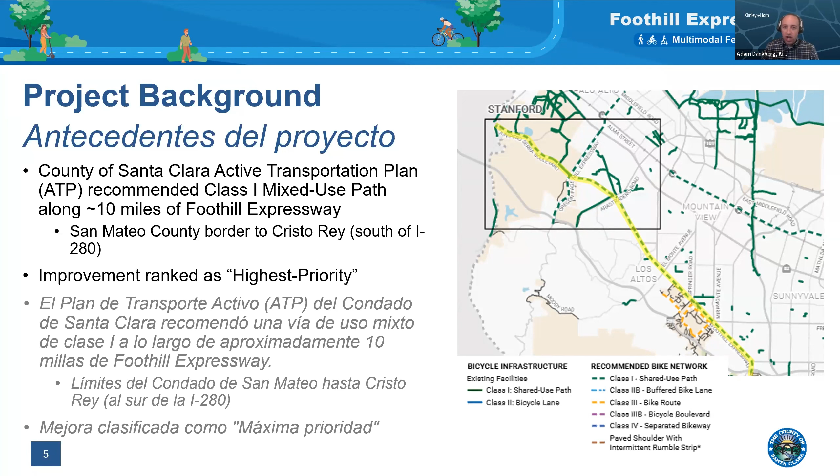Our study is building off that initial recommendation to do a much deeper dive into this corridor, to identify what can fit and what some potential solutions are, looking at both the specific Class 1 recommendation as well as other opportunities to improve walking and biking in this corridor. This recommendation in the active transportation plan was rated as highest priority, the most critical tier of improvements, and that's why the county very quickly moved from that transportation plan into this project, where we are looking at what can actually be done to advance improvements here.

As I mentioned, the project corridor we are studying is the full length of Foothill Expressway and Junipero Serra Boulevard in Santa Clara County, extending from Alpine Road and the Alpine Trail at the county line, down through Stanford lands, City of Palo Alto, Los Altos Hills, and ending just into Cupertino south of 280. So we'll be looking at that entire segment.

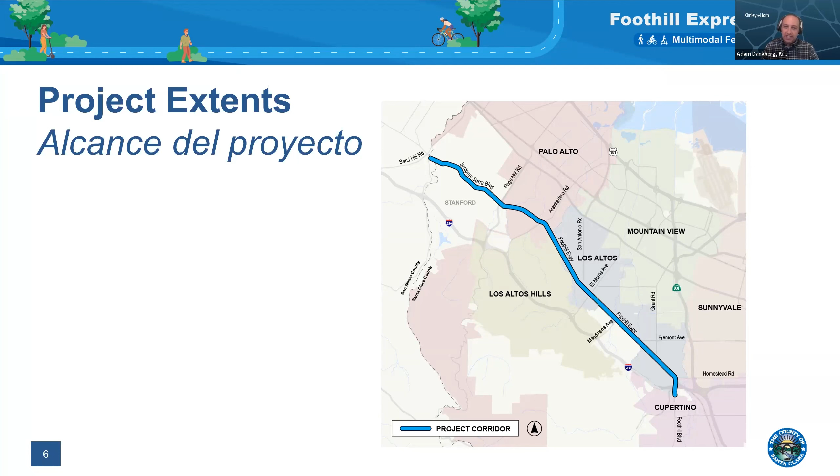In terms of what this project is, it is a study. So there is not money yet at this time for final design or for construction of any improvements. We certainly haven't identified what the improvements are yet — that is the purpose of this study.

So we're starting out by evaluating current conditions, trends, and behaviors in the area. We're conducting engagement like tonight and last night, and we have an online survey that we'd love for you to participate in. We're collecting all that feedback and comparing it with the current conditions to identify potential solutions to improve walking and biking in this corridor. We'll develop some alternatives, come back to the community, then identify a preferred alternative and an implementation plan to advance the project for the county to pursue future funding opportunities.

Our scope of work takes us through preliminary engineering, and that is it. The county will need to find more money for future phases. This current phase is funded by a VTA Measure B grant, so we appreciate their contribution to this effort.

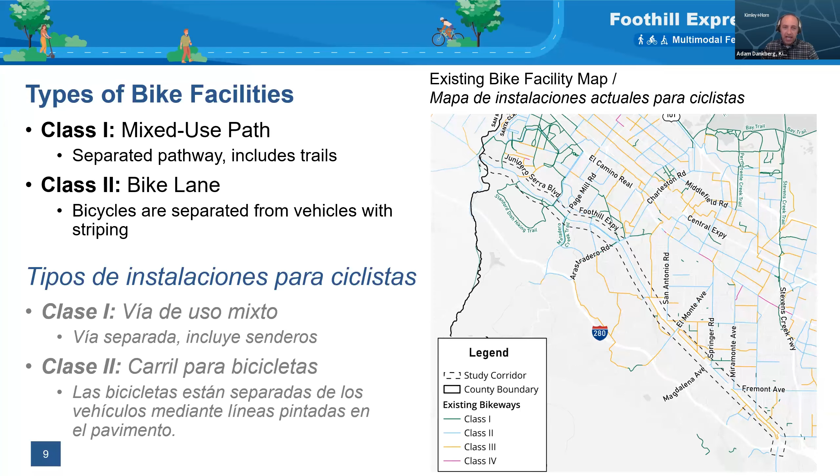So continuing on, Class 3 is a bicycle route. Bicycles are allowed, but there's no dedicated space specifically for cyclists, so bicyclists share the street with motor vehicles. The remainder of Foothill Expressway is considered a bicycle route. There are shoulders, but they aren't marked as bike lanes, and in certain portions cyclists need to share the traffic lane.

Class 4 is a bicycle-only facility, different from a Class 1, but separated from vehicles - it can be separated by bollards, concrete medians, or raised to curb height. There are different ways of separating it, but the idea is there's some separation for bicycle lanes from vehicles. These can be either 1-way or 2-way, and there are not currently any Class 4 facilities on Foothill Expressway or Junipero Serra.

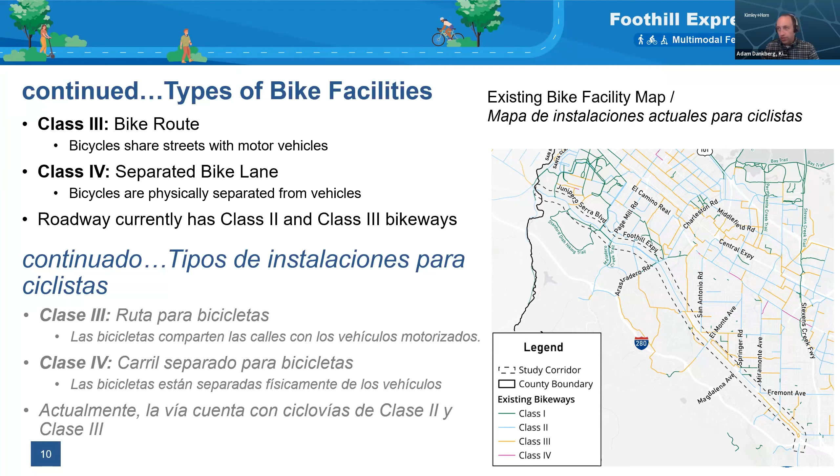Next we wanted to walk through the corridor to inform what we've learned so far about the existing corridor configuration and some key challenge areas we're aware of. We had been out there and observed the corridor to identify initial findings, and we'll pair that with feedback from this process.

So the far northern segment, north of Page Mill Road - a few things stuck out. We observed pedestrians and runners in the bicycle lane on the shoulders, running up and down the corridor. This segment is unique with 1 lane in each direction and no medians; the rest is a wider configuration. There are limited crossings of the corridor on Junipero Serra, mostly at limited intersections, and even there some crossings are missing. There were recent traffic calming measures installed between Campus Drive and Stanford Avenue that added medians and chicanes to move the roadway and reduce traffic speeds.

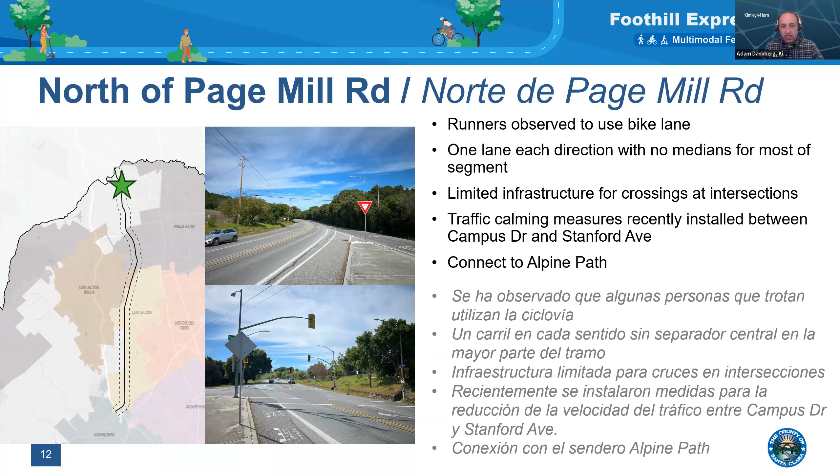We also note there's the Alpine Trail at the far northern end in San Mateo County. Moving one segment south, between Page Mill and Arrastradero, the corridor widens out a bit more and there are marked bicycle lanes. There are some really challenging intersections that exist at several locations, where it's not just Foothill Expressway and the cross street, but frontage roadways that intersect the cross streets really close to Foothill Expressway.

So you end up with complex intersections with a lot of vehicle, pedestrian, and bicycle movements in all directions, causing navigation challenges particularly for pedestrians and cyclists. The Arrastradero Road/Miranda Avenue intersection is certainly one of the most challenging, particularly given its proximity to Gunn High School. Hillview Avenue is another challenging intersection in this segment. This project isn't just about Foothill Expressway, but about creating a connected bicycle and pedestrian network across and through that entire area. Palo Alto is currently updating its bicycle and pedestrian planning, and we'll incorporate our work with that ongoing effort.

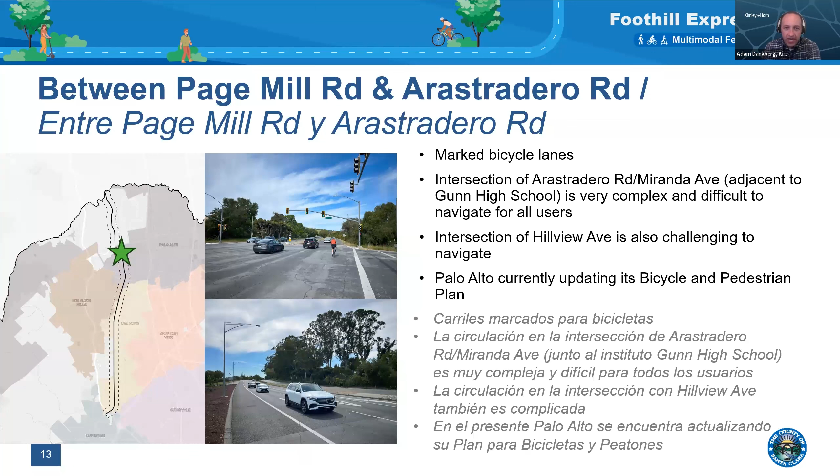The next segment is between Arrastradero and North San Antonio Road, through downtown Los Altos, with a lot of pedestrian activity crossing Foothill Expressway and interest in improving the safety and comfort of those crossings. Not unique to this area, but common here, is the provision of right turn slip lanes - lanes separated by a pork chop or raised island from through lanes that allow higher speed turns onto or off the expressway. This configuration works okay for traffic, but has safety challenges for drivers, walkers, and cyclists, so it's something we can focus on improving as part of this project.

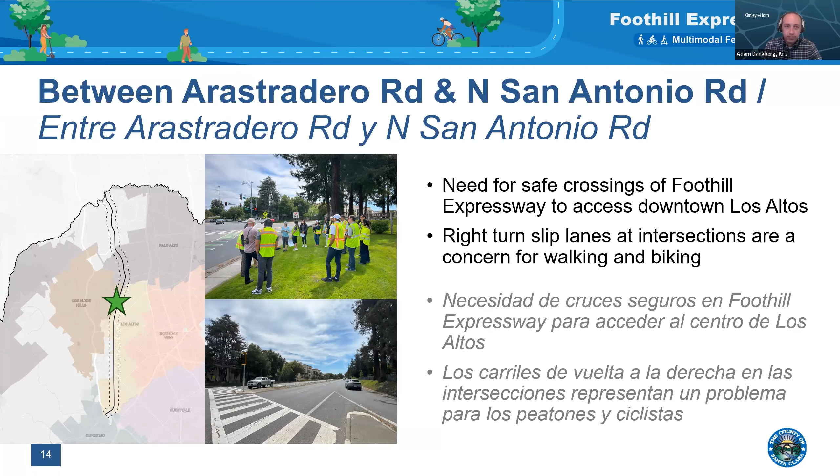Some additional complex intersections at Springer Road and Magdalena Avenue. There are some intersections that have received recent improvements, such as Grant Road and St. Joseph Avenue, where additional striping and crosswalk improvements were installed. This location also provides access to Rancho San Antonio County Park and the Open Space Preserve, which has a couple access points that increase pedestrian walking activity in those locations.

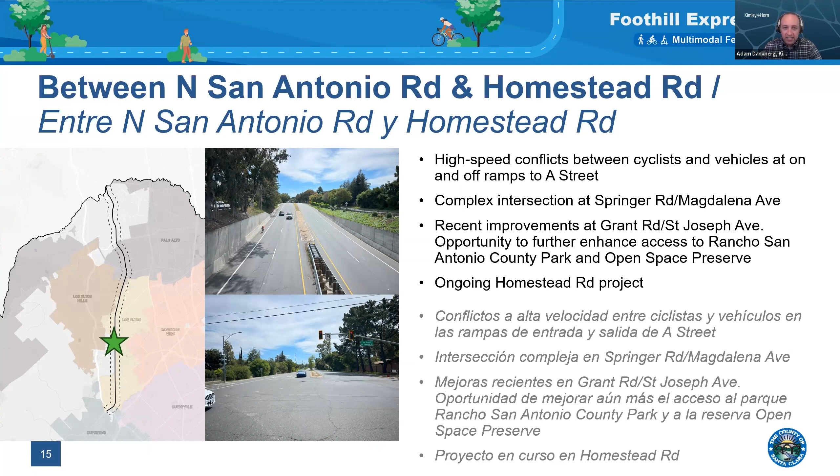We also want to recognize the Homestead Road project that VTA and the county have been working on with the cities along the Homestead Road corridor. That project is not yet completed and is still advancing, and we are recognizing that it has some very specific improvements around that Homestead Road intersection.

And then finally, the most southern segment includes the 280 interchange. This interchange is certainly challenging for pedestrians and cyclists. There are no bike lanes marked here, and there are high-speed ramps for vehicles entering and exiting the freeway, making it challenging to cross those vehicle weave movements.

There is a portion of this corridor that does have a parallel path. You can see in the little image on the top there, but it is not particularly visible and it's not accessible. So while it's one of the few locations where there actually is a pedestrian type facility near the corridor, it's not really an optimal one. We also want to recognize the access to the open space via Cristo Rey Drive, which is the southern limit of this project.

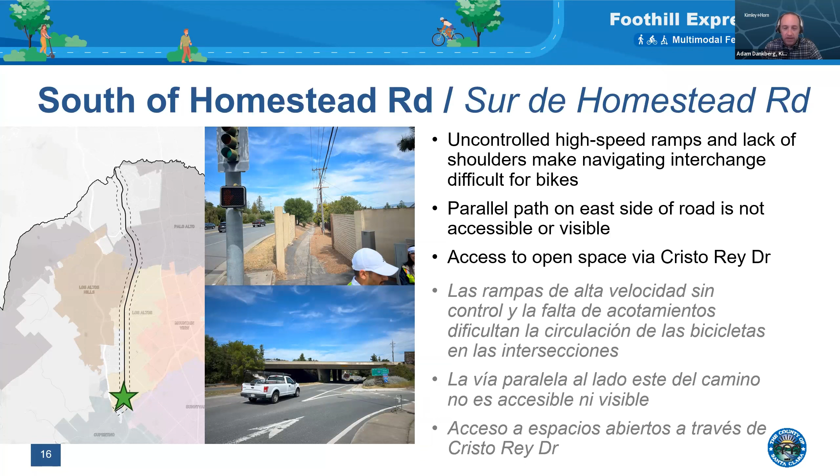So we have completed collision analysis of this corridor, looking at data between 2020 and 2024 inclusive, so 5 years of collision data. This is data that is available to us from the state, collected from local police departments, so we know it's not every collision. There's some discussion that a bicycle fatality is missing and not included here, and we certainly recognize it's not the most complete data set, but it is the most complete one we are able to access.

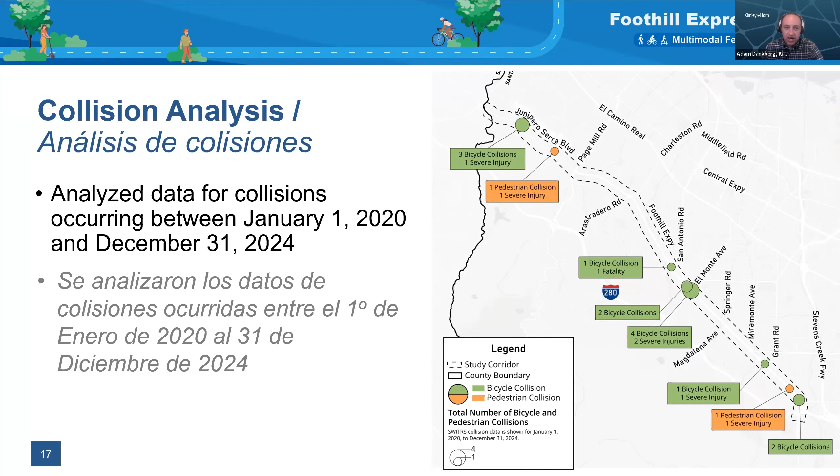This collision analysis does provide insight into collision hotspots that we can focus on for improvements. There were 119 total collisions in this corridor. 15 of those included a bicyclist or pedestrian, and 7 of those involved severe injuries or fatalities. One of those was a cyclist fatality, and the other 6 were severe injuries. Again, these just identify particular hotspots for us to focus on.

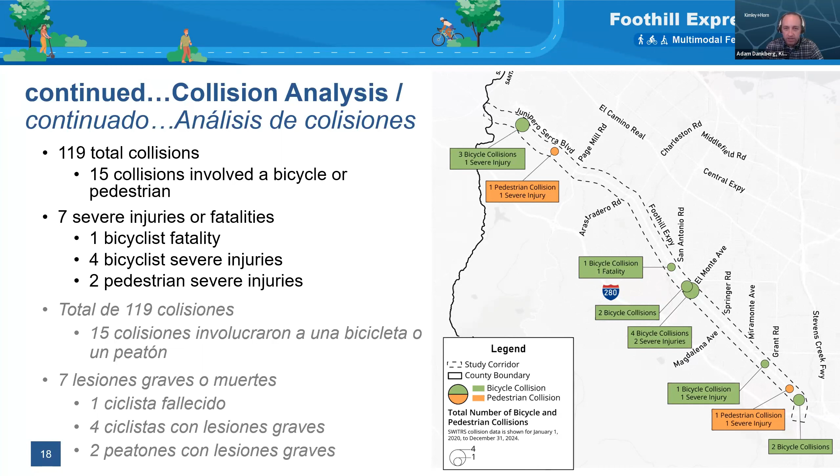So in terms of potential solutions, while I started with that initial recommendation of a class 1 facility, which is something we will be looking at, there are a number of other walking and biking improvements we'll be looking at as part of this project. That includes providing new crosswalks where they don't exist today, for example where a leg of an intersection doesn't have one, and improving crosswalks where they do exist to make pedestrians more visible, reduce vehicle conflict speeds, and reduce the overall conflict between vehicles, pedestrians, and cyclists.

Improvements to slow right turn vehicle speeds, like I talked about with the free right turn movements. Looking at modifying intersection operations, particularly some of the more complex intersections, to reduce the overall number of conflicts or make them more intuitive for all users. Providing dedicated space for cyclists and pedestrians, which could include a shared use path. And we're certainly open to other ideas and suggestions from the public.

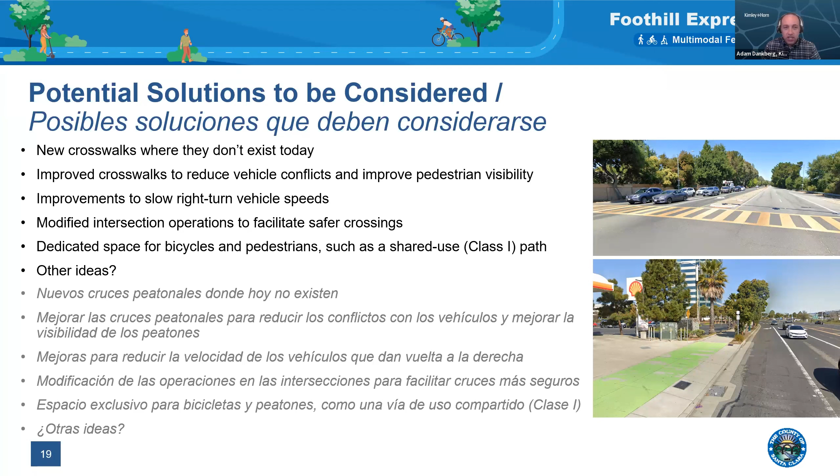In terms of next steps, right now we're really focused on collecting as much feedback as possible during this outreach round one around corridor hotspots and potential improvement types and strategies for this corridor. We'll be completing our existing conditions analysis concurrently, and then from that, we'll gather all that input and develop and analyze some initial alternatives for the corridor.

Then we'll conduct a second round of outreach where we'll come back to you all with some initial ideas for improvements and get your feedback on those. And then we'll move forward after that with identifying a preferred alternative.